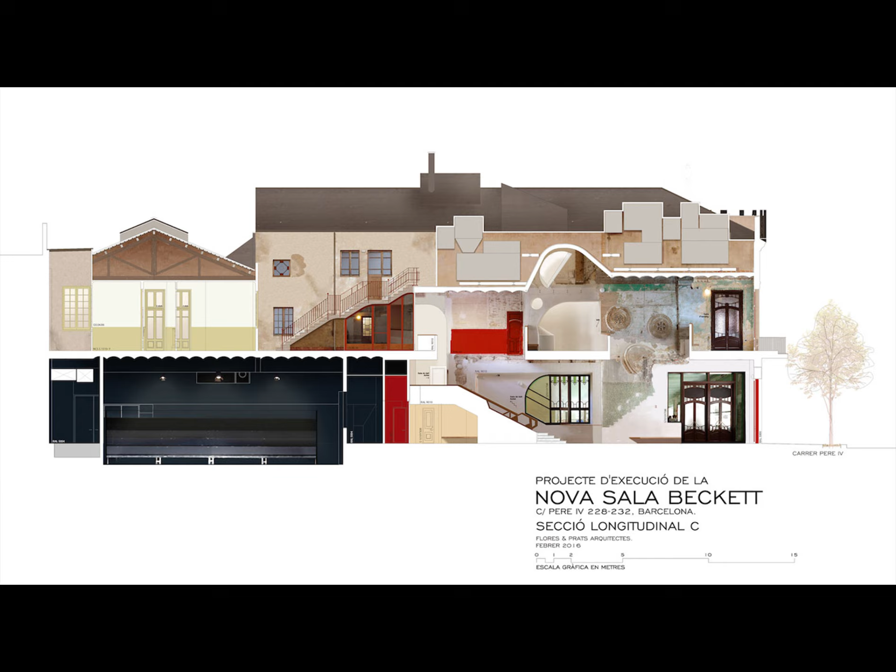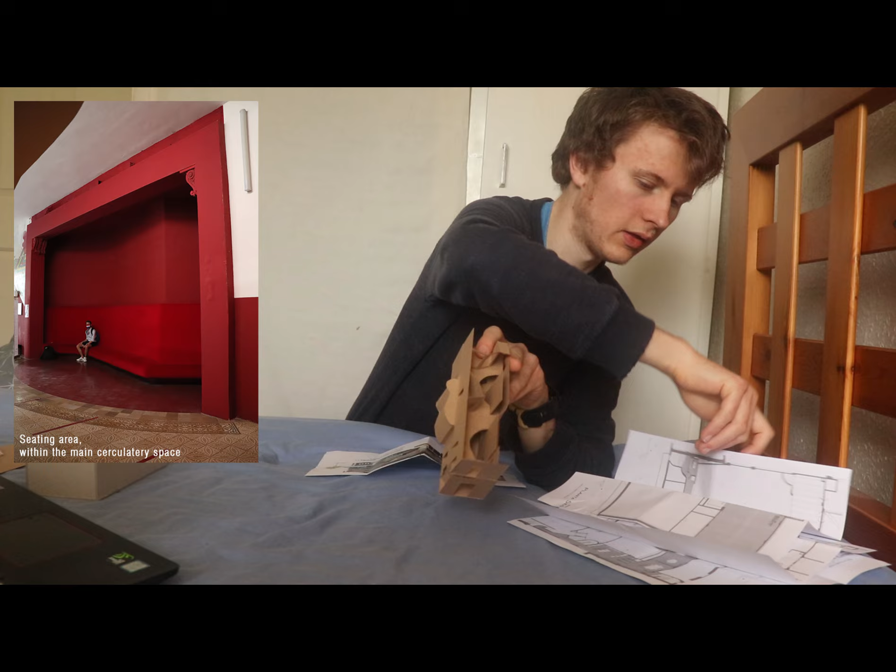This connection is relevant in regards to my model, in the sense that the model is exploring the idea of circulation and how the circulation creates theatre. That's one of the ideas of the building, in the sense that it in itself, just in the mere circulatory space, this is the main entrance, the theatre and all that is back here, and then these are more to the ground floor, is open to the public, making it a very civic, very communal building.

This is very different to standard theatre, where the building is closed off before and closed off after the performance. This is an integration into the community that is furthered through the circulation, in the sense that there's only one form of circulation. Okay, I'm sure there's a fire escape, but the main circulation is for the actors and the community the same, and therefore it's putting them on an equal playing field.

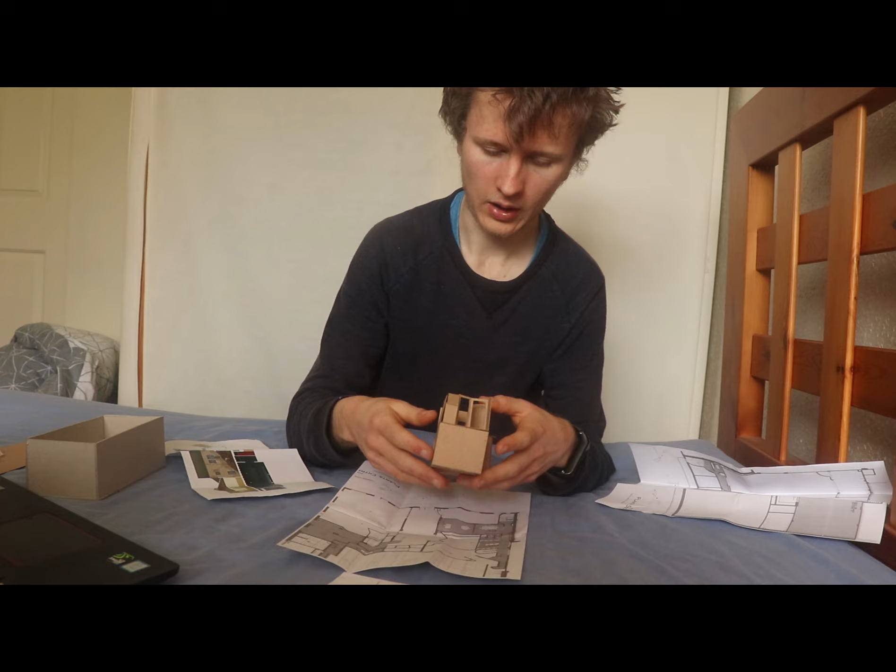Now, as soon as you start talking about the circulation, as you can see here through this model, you have these two points of viewing into the lower floor, and you can see that through the building, hopefully. And this idea of circulation through watching people interact with the space, because there's a whole journey, and that journey I try to embody through the model. And to give context, because looking at a model just like this is pretty pointless unless you know what's around it, I've printed out these plans to better understand the connection.

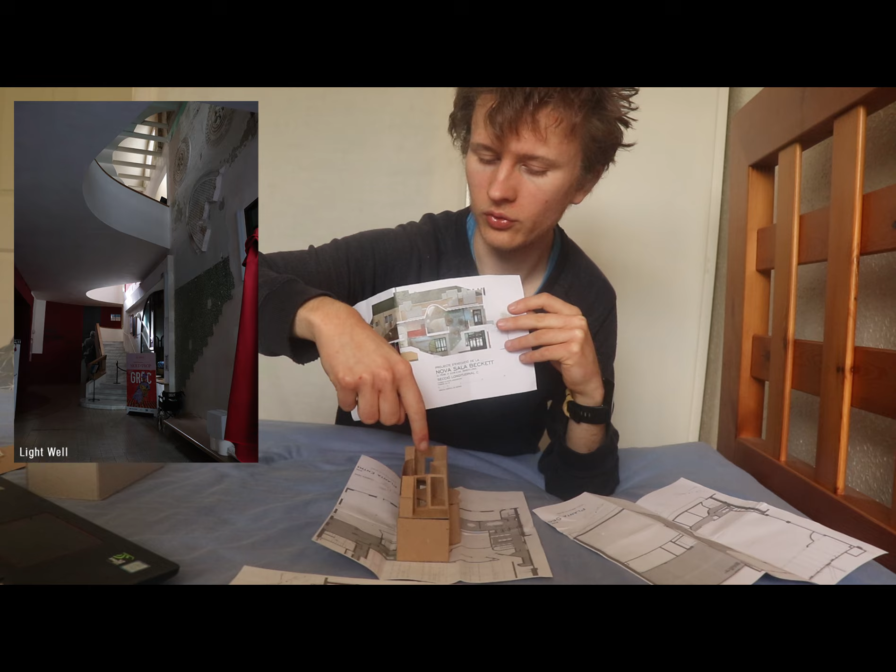Now, the section was printed because I wanted to show the light well, because I couldn't show it in the model. But essentially, the light well comes through here and then illuminates down into the landing of the top area of the stairs, and then starts illuminating below through the penetration, and therefore inviting people up through the building.

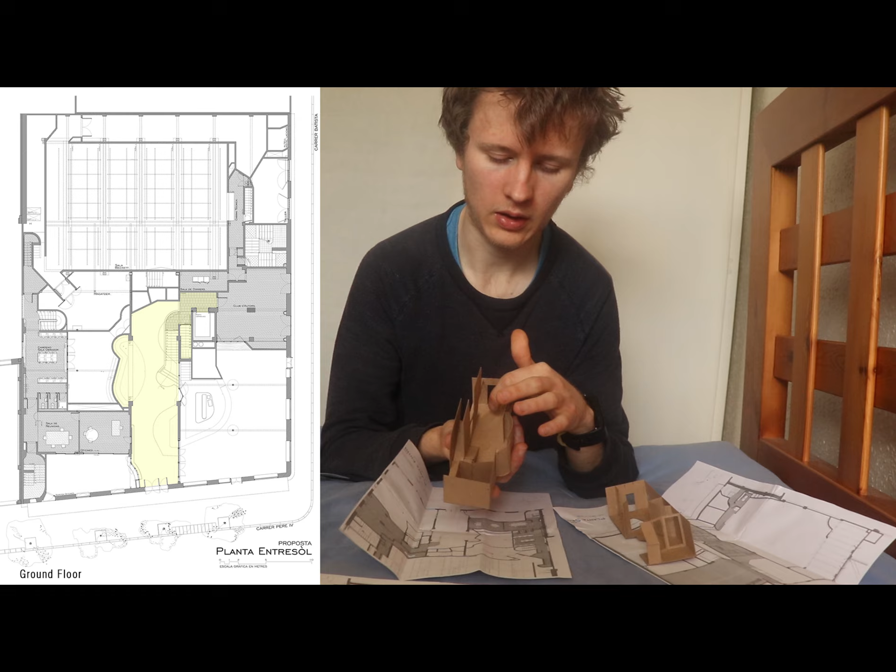But this idea of theatre is embodied in the idea that it's this journey of circulation from the entrance around and up here, and as soon as you go from one point to another, you look down, you look up, and you connect with other people, and you're meeting people, and it's this whole creation of theatre that's embodied in this building. And then, just to show off my plans again, I'm just going to show you

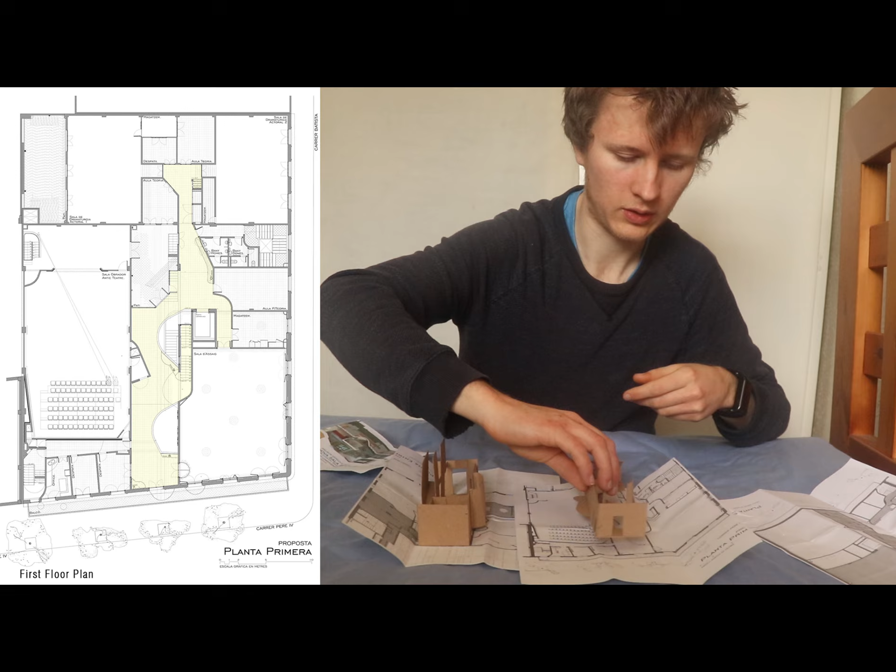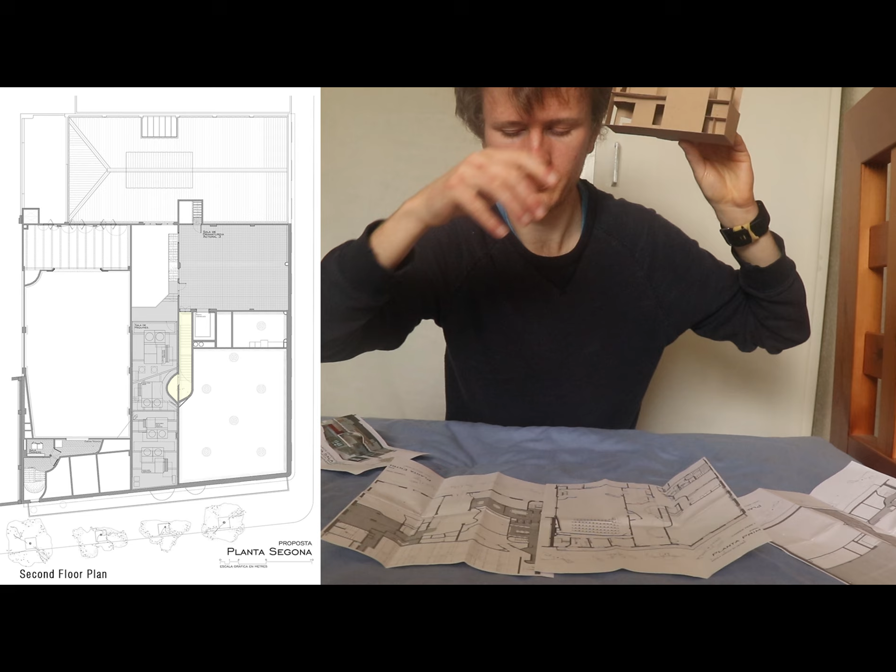how they all connect, therefore making my life easier when trying to explain the building, while also allowing me to put the building together, and allowing you, the viewer, to actually peer through the building to try and give a sense. Because if you look up here, as soon as you enter the building, you're just drawn up the light well, and also these penetrations are just fascinating, fascinating in the sense of intrigue, and then you've got the stairs that seem to lead to nothing, and therefore the circulation up is this whole journey that the building is portraying.